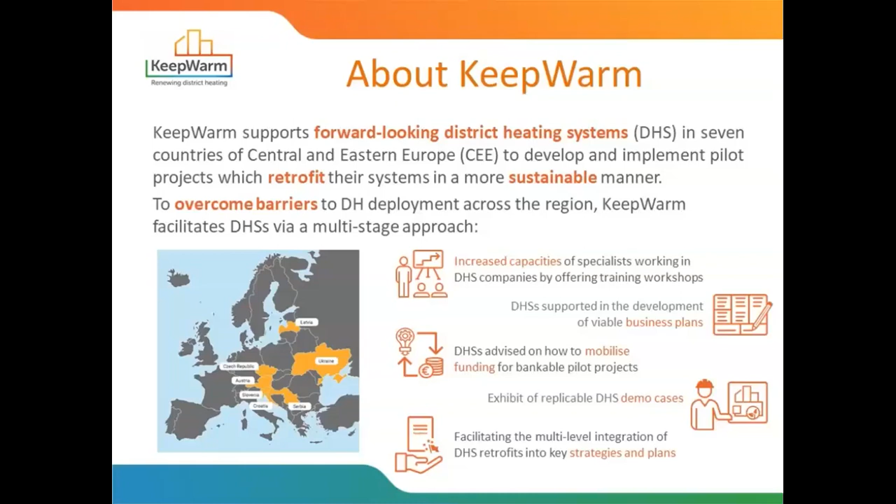So as I said, we are 11 partners. 2 of us are based in Germany, including GIZ, who is the coordinator of the project. And you will be hearing today from the Association of District Heating for Czech Republic, LEV Steiermark in Austria, and also KT Energy in Ukraine.

KeepWarm retrofits. We have 5 parts of our hierarchy. These are designed to help district heating systems to retrofit to make more efficient operations with cost-effective investments. And this ends up creating reliable services which contribute to climate goals. The primary topic for today is going to be on the first level, which is retrofitting and optimizing grid production efficiency. There are more, but it seems that this is a PDF, so I had some animations there, but I know them by heart.

The second level is about renewable energy integration into district heating systems. The third level is about integrating excess heat. This would be from factories or data centers or something like this. And the fourth level is about waste to energy, but only if it's in line with sustainable waste management strategies. These 3 components, second, third, and fourth, will be the main perspective for our next webinar. The 5th one may be touched on a little bit today. It's about getting smart district heating and smart control mechanisms in place.

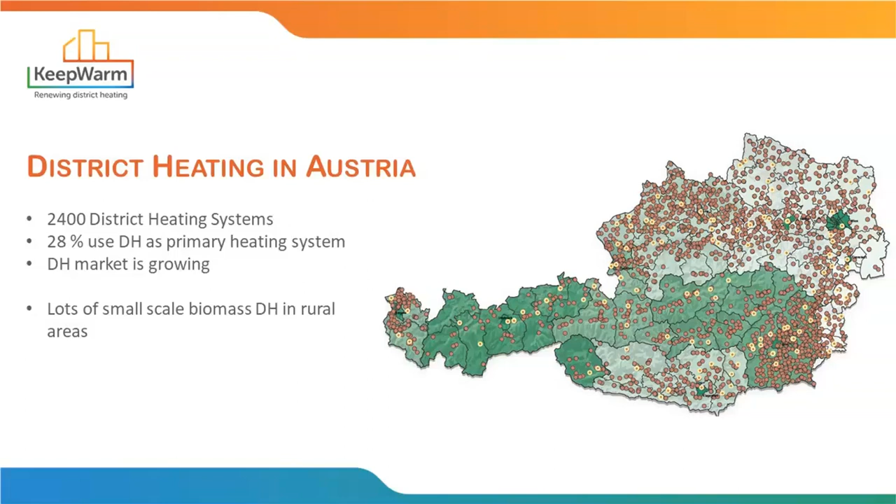So the goal in the district heating sector from the government is to be 100% renewable by 2040. And therefore, we have firstly to optimize the systems by reducing temperatures, by increasing grid densities, reducing the losses, and of course, by replacing the fossil share with renewables from biomass, heat pumps. Excess heat is becoming a bigger topic right now.

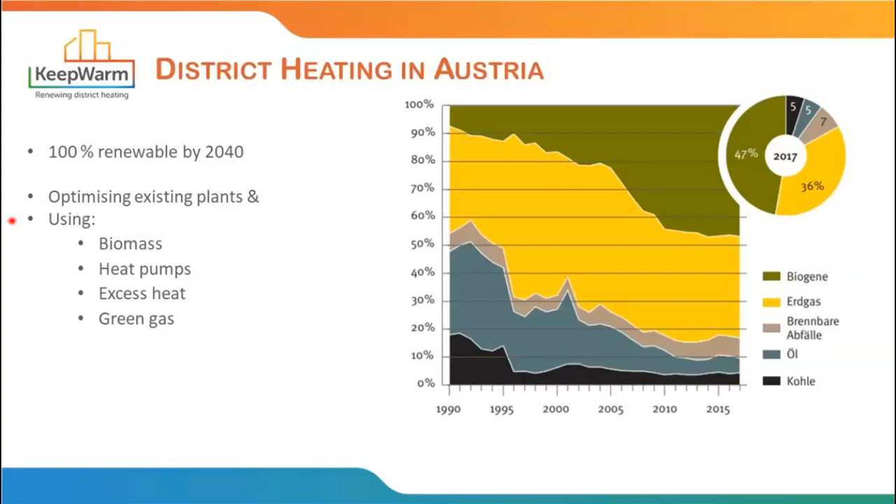And also we have on the political side a big topic about green gases, which more or less means methanization of biomass residues, or also methanization with surplus energy from solar or wind power, and use this methanized green gas in the natural gas grid as a replacement of the natural gas. Yeah, that's it for the structure in Austria.

And now I want to show you two showcases of district heating plants we supported in the KeepWarm project in their optimization steps. And I just briefly want to show you the first one, which is the district heating plant in Ligist in Styria. And that's a quite typical Austrian biomass district heating plant, small scale. You can see 2.5 megawatt boilers, and it's quite old for a biomass plant.

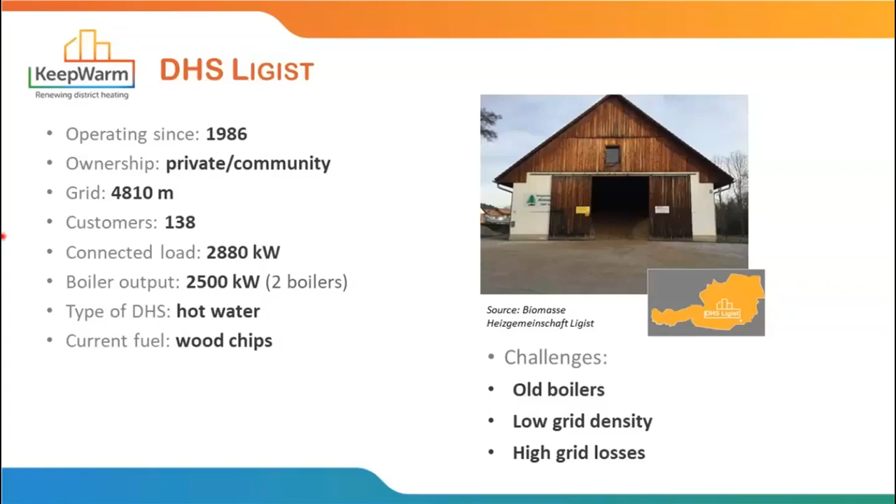It was built in 1986, and at this time the technology wasn't as developed as it is today, and therefore the operators struggled with low efficiencies of the old boilers, with technology which wasn't state of the art. And also it's a very rural area, therefore they had a quite low grid density and therefore high grid losses. And this project was, let's say, a quite straightforward project.

They decided to replace the boilers, to have more efficient boilers, and replace the installations in the boiler house. And they also plan to make a smaller grid expansion and connect some new customers, which was a bit postponed due to the Corona situation right now, but they plan to do it this year also. So in total, the investment will be 1.4 million euros. And with this, they can increase their efficiency by about 6%.

And what's even more crucial for them is they increase the annual profit by 30%, although including the 1.4 million of investment, if I include the depreciation and the financing costs. And of course, we also have additional climate effects by replacing individual oil heating with this renewable district heating.

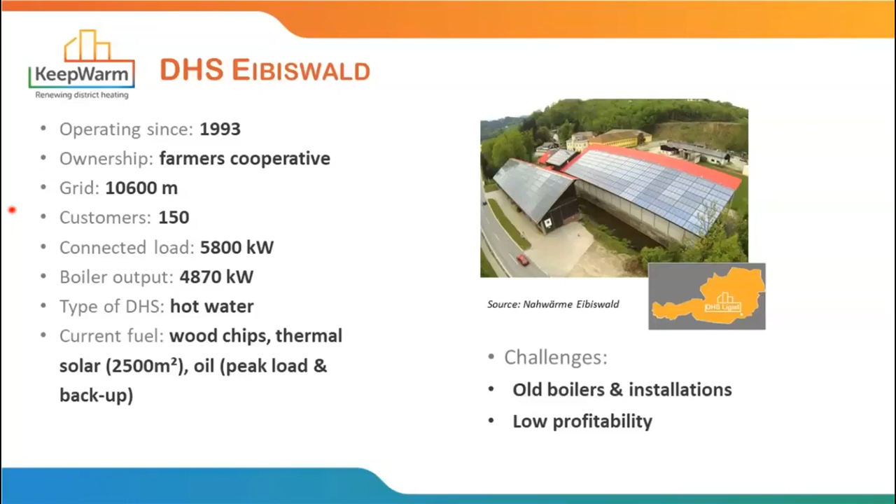They have 2,500 square meters of thermal solar area, which mainly delivers energy during the summertime, so they can switch off their biomass boilers. And they also have oil boilers, but just as a backup and for peak load. And the fossil share in the energy generation is below 1%. So what they did is they decided to build a completely new boiler house. So they built a completely new house on the other side of the storage room with completely new installations, new boilers, new filters, new controlling system, which made them really ready for the future.

And they also decided to take over a nearby district heating plant, which was really inefficient, and decided to shut down this boiler house and made a grid connection and heated them from the new boiler house. And they also made a massive grid expansion in Eibiswald, in their town, and connected plenty of new customers, and in total invested 7 million euros. The work is nearly done at the moment, and what's really impressive, they nearly doubled their customers with this investment, and they increased the sold heat by about 62%.

And now in total they have about 20 kilometers of grid length, which is quite a lot, especially if you know the area here in Eibiswald, where the district heating is located. There live about 2,000 people. So I think that's also a good example of how district heating can work in a smaller village or small towns.

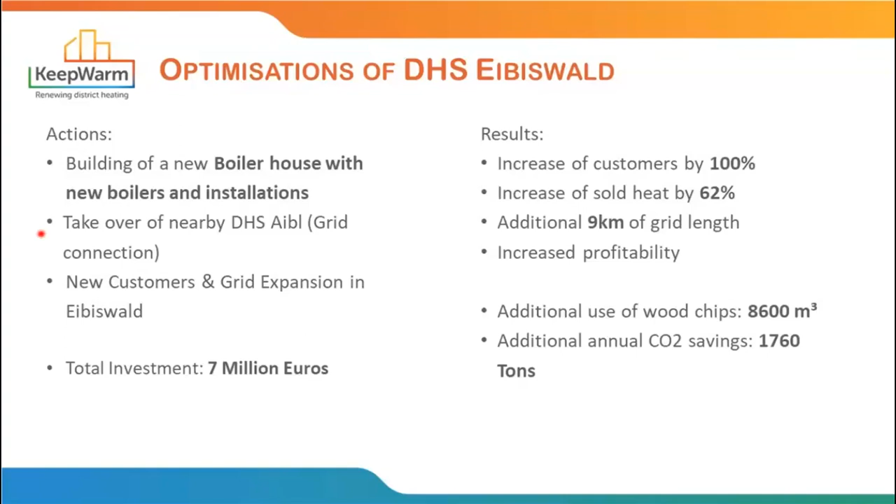Now I want to go to some more technical parts, and one thing I think is very important to optimize, especially biomass district heating plants, is the use of a flue gas condensation, which is also built in Eibiswald. And I would say in new biomass district heating systems, this is state of the art. However, we have plenty of older ones which don't have such a flue gas condensation.

And what it does is use the hot flue gas inlet and condense the water in the flue gas with the cold grid return flow temperature, and therefore heat up the temperatures in the grid with the flue gas. And the second effect we have with this condenser is that we reduce dust emissions to a certain level, which is also quite beneficial.

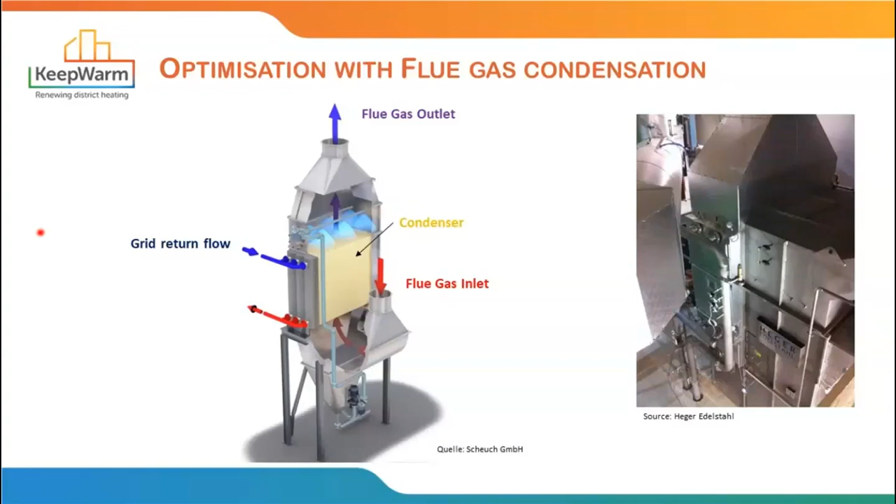However, for the system to work efficiently, we need low return flow temperatures, as it's really necessary that we come to a condensation process. We have here a dew point, which is the temperature in the flue gas. And this flue gas temperature is mainly driven by the return flow temperature. And therefore, we need return flow temperatures of below 50 degrees so that we come to a condensation process where we can get additional efficiency. In practical operation, we see about 10 to 20% additional energy in comparison to primary energy input with this flue gas condensation.

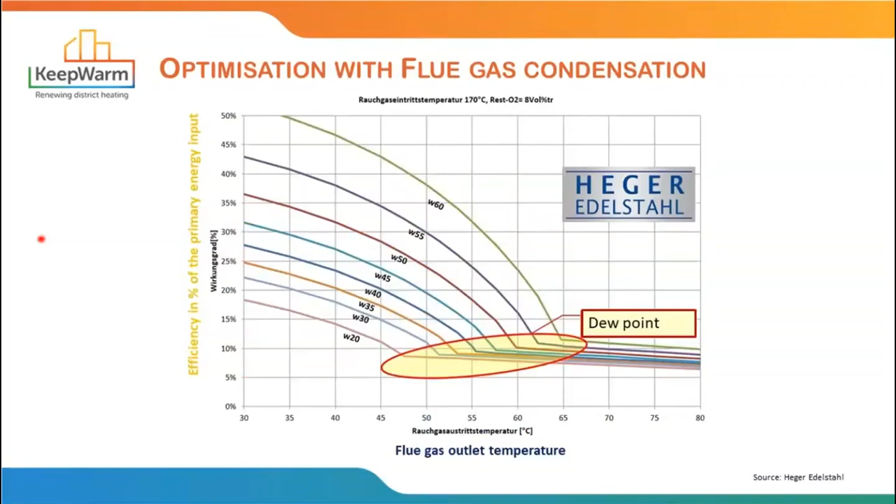In this example, we have a biomass steam boiler of 1 megawatt, and in combination with a flue gas condensation and this absorption heat pump, we can get 700 kilowatts additional energy out of the system. So with a 1 megawatt boiler, we get 1.7 megawatts out in heat delivery, which is quite a cool thing. This is quite new, and now we have the first couple of examples in Austria where these are built in. I think this can be a good potential in future.

However, one more thing, we can not just use it with a flue gas condensation, but this low temperature source can also be any other low temperature excess heat, which can't be used if we don't have heat pumps, because these low temperatures, for example 40 degrees, can't be made usable otherwise.

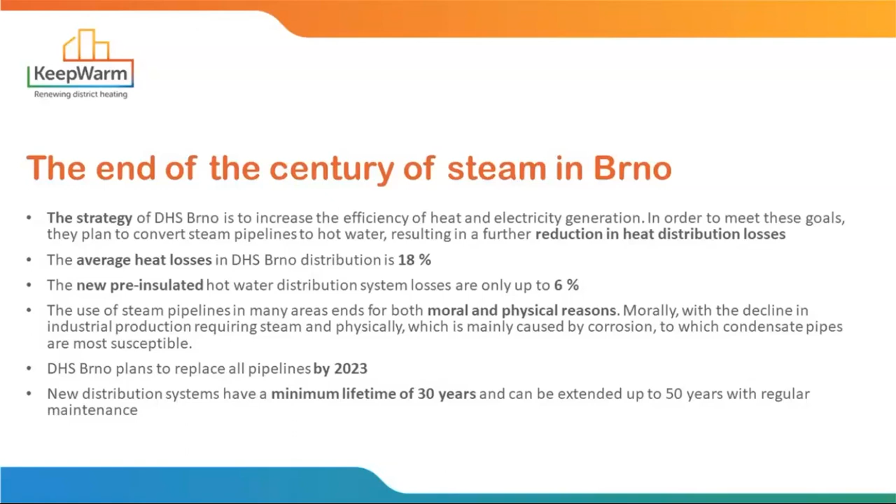Well, okay. All right. No. Right. Okay.

What is the problem? The problem, of course, is that we don't change only the network itself, but we also have to change steam exchanger stations at the customers' premises, which is the biggest. Usually, this is quite a big problem because you have to negotiate with customers. It means that they have some discomfort because they have some time without heat supply. They have to change their equipment, etc. So this is really the most tricky part usually when replacing heat networks: the cooperation with customers. Persuading them this is needed, helping them actually to adapt to the conditions so that you don't lose your customers in the process, because then the whole project of refurbishment is not really bringing what was expected.

Regarding modern exchanger stations, of course we can achieve also quite significant heat savings at the customer's premises. Typically, heat network upgrades are regarded as saving on the district heating company side, but the reality is that we can achieve up to 15% savings also on the customer side because of better regulation, lower heat losses from the heat exchanger station itself, etc. So it also brings quite significant benefits directly to the customer. It's not only about decreasing losses in the system, it's also about more efficient heat supply at the customer's premises.

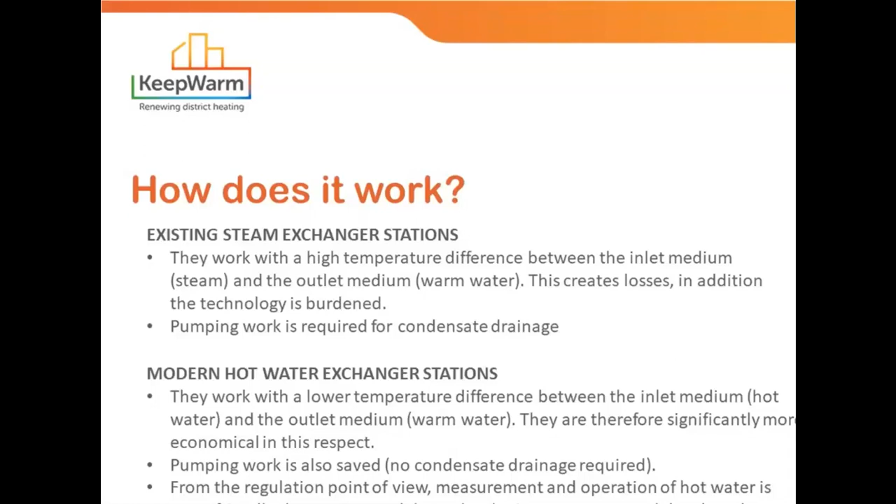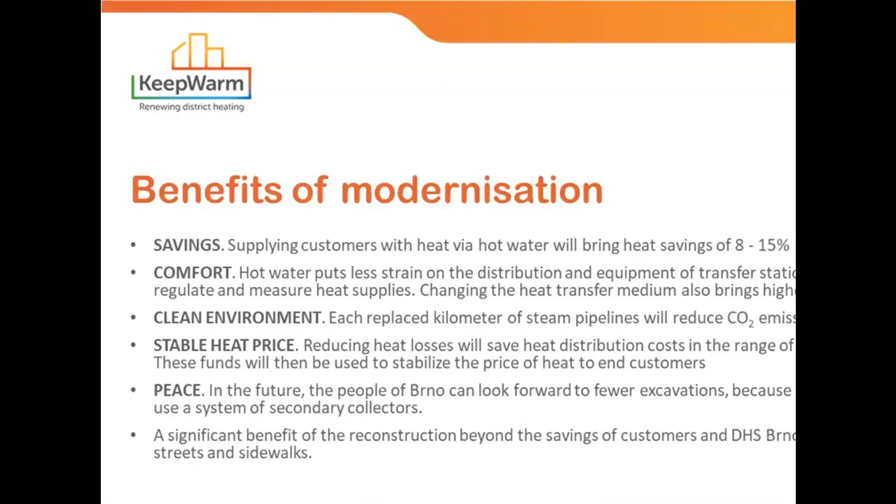So, benefits of modernizations. Of course, as I've said, energy savings, also on the customer side, comfort, of course, reduction of CO2 emissions; every kilometer reduces CO2 emissions, more stable heat price, and of course peace with the citizens of the city, because in the future Brno will have much fewer excavations in the city.

Also because most of the new networks are put into the newly built system of collectors, which means that in the future any replacements or any work on the network will not mean that you have to dig up the city and cause disruption to the life of the citizens. So, well, next one.

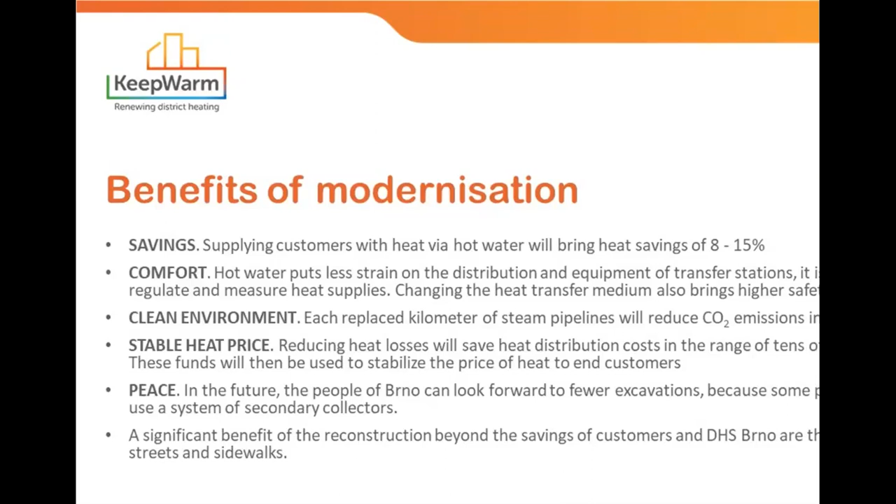The financing of the project. The refurbishment project was mainly financed by the district heating company's own resources, but they are also using subsidies from funds. Concretely, it's the fund which in the Czech Republic is known as OP PIK and is managed by the Ministry of Industry and Trade.

The cost of replacing steam distribution systems varies according to local conditions. It's a very big difference whether you go through a grassy area or whether you have to dig up the road or the pavement or sidewalk. Then of course that increases the cost. And if we add the cost of connection pipelines, the final cost is around 1 million euro per kilometer of new network.

So the whole cost of the steam network refurbishment project in Brno is about 25 million euro, of which 18 million will be own investment and 7 million will be subsidy from EU funds. Because of the high cost of the project and also construction constraints, that most works can be done only during the outage or during the summertime, the project is divided into multiple years, and as I have said, it should be finished by 2023.

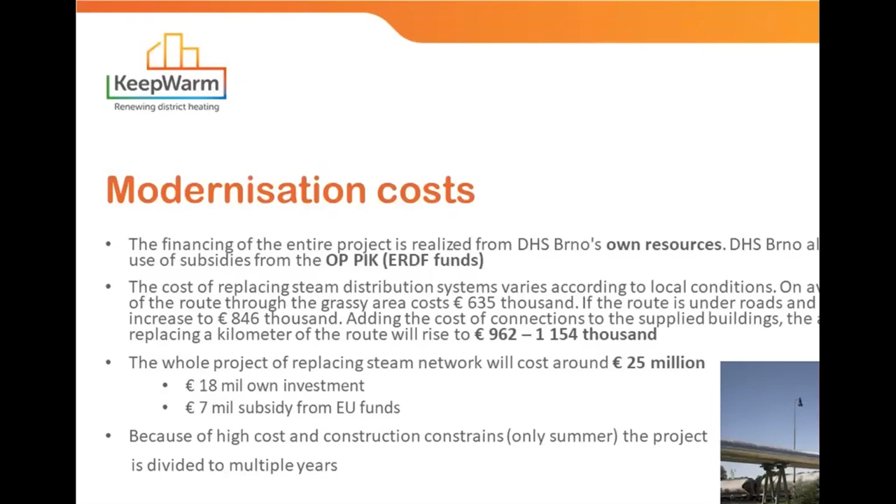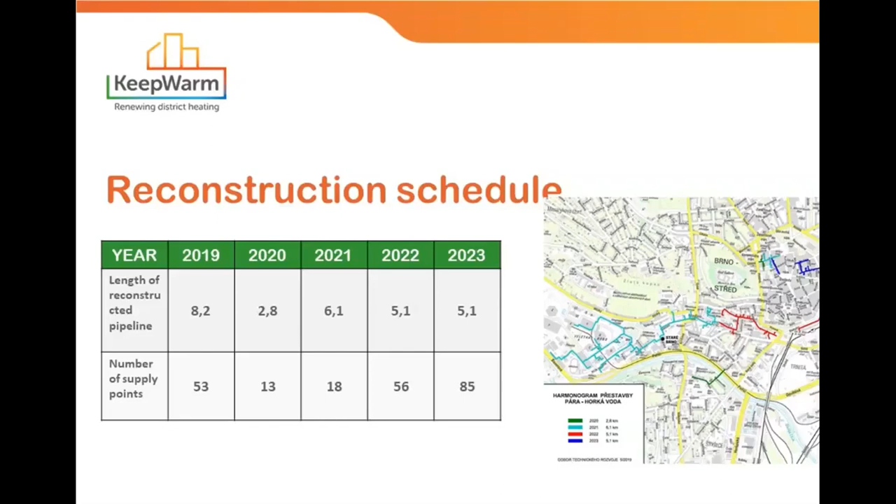And the last slide is about the future, or a broader perspective in the Czech Republic. We are now closely cooperating with the Czech government, but also with the European Commission, on using the Just Transition Fund in coal regions. In the Czech Republic, we have 3 coal regions: Northern Bohemia, Western or Karlovarský kraj, and Northern Moravia. And in these regions, we have identified 344 kilometers of steam networks, which should be replaced until 2030. So it's quite a considerable amount.

Total investment expected is 400 million euros, and we expect that it should be supported from the Just Transition Fund. It's expected that part of the money will come from there, and also the Modernisation Fund, which should start to be operational next year, to also finance these important constructions. Another aspect we didn't cover yet is creating jobs for people, because this investment helps to create economic activity and jobs, particularly in the areas affected by closing down mining and plants. Thank you very much for your attention.

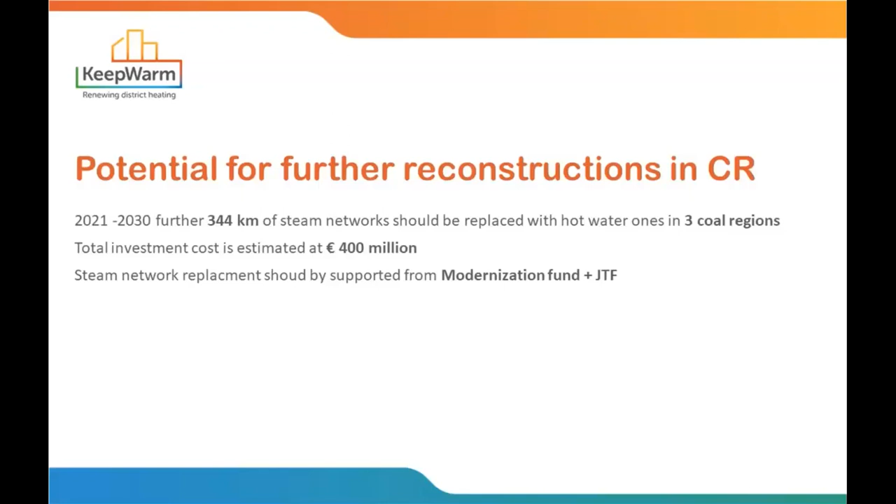Well, thank you, Martin, for delivering us the case of Brno in the Czech Republic. One question posed here from Francis: he took note that the losses dropped by 66%, and asks, is this due to better insulation, or was the system temperature also changed from 200 to 105 degrees, as you were highlighting?

Yeah, it's actually both. Because first of all, the new pipelines are much better insulated than the old ones. That's the first reason. Second reason is that in the condensate pipelines you have lots of leakages, because there's a high level of corrosion on returning condensate. So you also have losses of condensate, and of course losing condensate also means losing energy.

And the third reason, of course, is much lower temperature, because with steam you have 220 degrees. With water networks, we are typically operating around 80 degrees. Of course, it changes during the year, but the temperature is much lower, which also means much lower energy losses. So the improvement regarding the losses is really very significant when going from steam to water network. That's why we are making great efforts to refurbish all the networks as soon as possible.

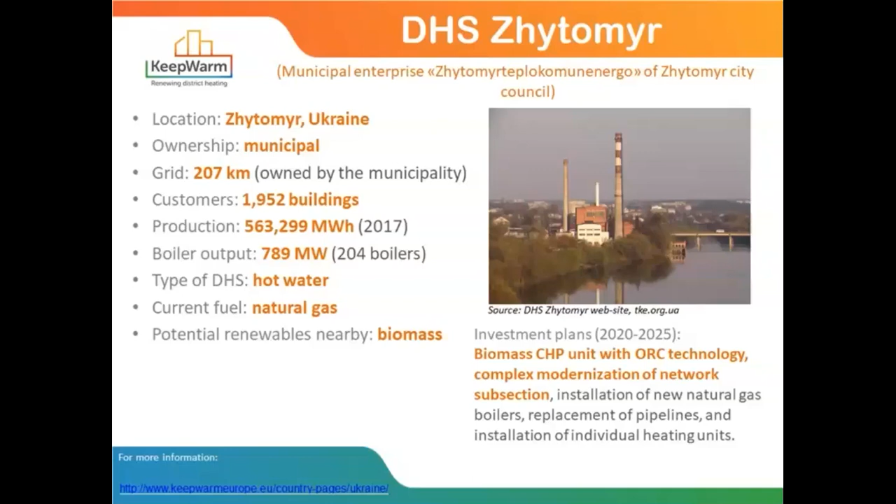Zhytomyr Teplokomunenergo, which is another city in our consortium, also some 250,000 inhabitant town. Many customers, but also many problems, for instance, many people have migrated to individual gas firing, but the company continues the development. A lot of modernization is going on. Several projects from EBRD, from World Bank, from NEFCO are being executed, including the biomass one. They plan to construct around a 10 megawatt biomass fired boiler. And the project is already on the way.

We have assisted the company in terms of calculating and providing additional input with regard to the plans of constructing a combined heat and power plant with 1 megawatt electric and 4 megawatt of heat, something like this. We visited the site already. So the opportunity is there. The city is interested. The company is interested.

But now with this coronavirus situation and also with the low prices for natural gas, the plans have been postponed, I shall say. Now in Ukraine the natural gas price is low, but the price for biomass is, in my opinion, unreasonably high. But I think it is temporary. The producers of pellets and wood chips just have not adjusted their behavior to the market trends. I hope that will happen in the future, and that biomass will continue its pace in Zhytomyr.

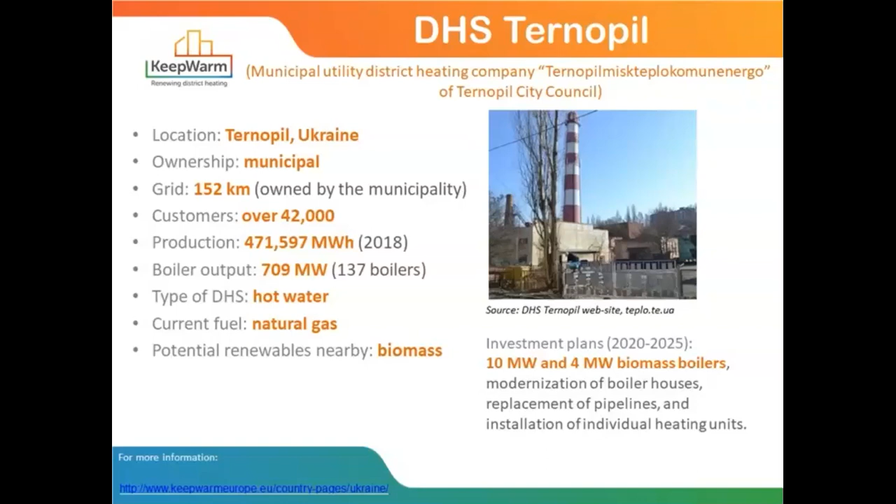And last but not least is Khmelnytskyi DHS. This is the smallest DHS out of 4 companies participating in our projects. It provides the heat to 1/3 of the population of Khmelnytsky, which is again around 250,000 inhabitants. It is mainly gas-fired, with only a few biomass-to-heat energy projects, very small scale compared to the overall heat load

of the company. What they are interested in, and we assist them in that, is basically they would like to centralize the district heating in one of the districts of the town where they have 2 big facilities nearby, which are both inefficient because of the small loads, and they would like to accumulate the load at one boiler house, while taking the other one out of operation.

It is also interesting that Khmelnytsky is now one of the leaders in Ukraine in terms of introducing the system of household waste management, including the production of... what is the name of... so this is the name of one of the products out of the waste. Bio-waste, maybe? It is not bio-waste. It is just compressed waste where they have taken some important elements out of it, and then the other parts of the waste they compress and use as a fuel. Yes, it is the case.

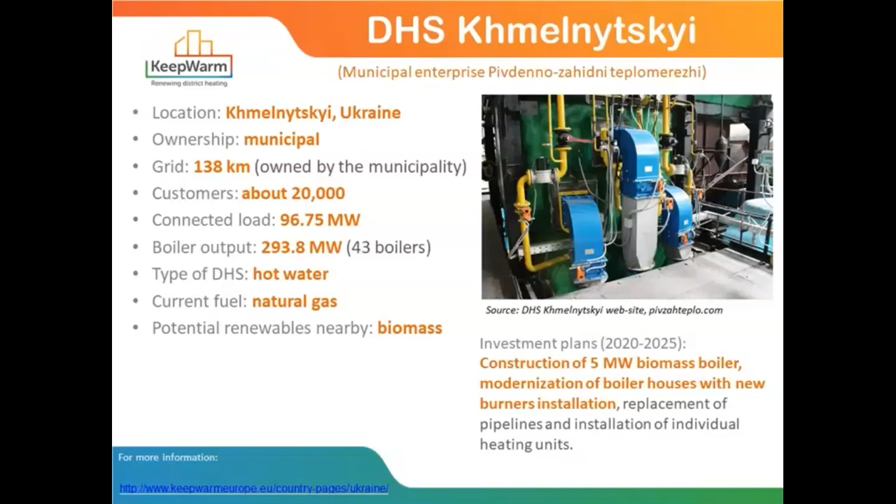So as said before, natural gas for the moment is the dominant fuel for the district heating sector. Simultaneously, the share of biomass is growing, and especially with this methanization of waste and other sources, it could be the case that natural gas will be gradually supplemented with these green gases. In our calculations, we have been using the prices of natural gas, but now reality has shown us that the fluctuations can be much more serious. So maybe we should adjust to the new reality.

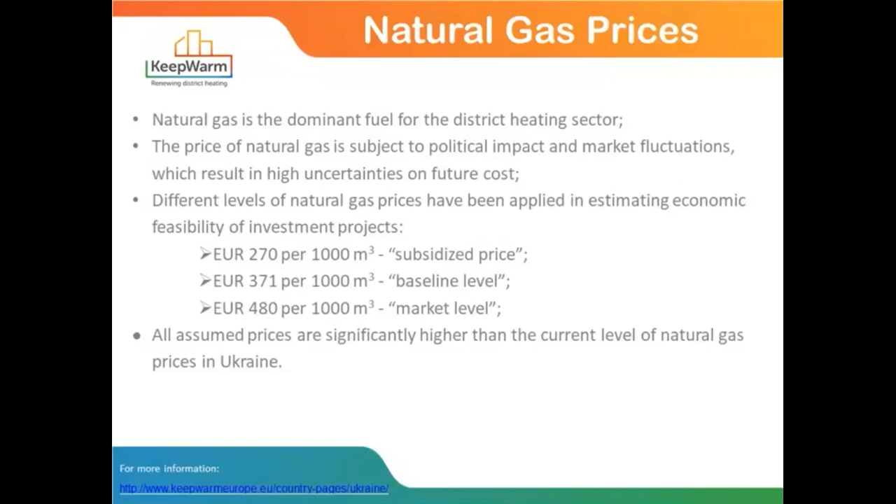Yeah. Kirill, in respect of time, I would like you to maybe conclude, so maybe we still get some questions for you as well. Yeah.

Basically the conclusions are the following: in Ukraine, improving energy efficiency and introducing renewable sources is possible and feasible. The companies are doing that, and they require some additional support, but gradually and step by step, they are managing to get closer to decarbonization and an improvement of both energy efficiency and application of renewable energy sources. Some external factors matter, but I think it is doable, especially if the necessary experience exchange is there, and also state support and municipal support. Thank you very much, and I look forward to the questions.